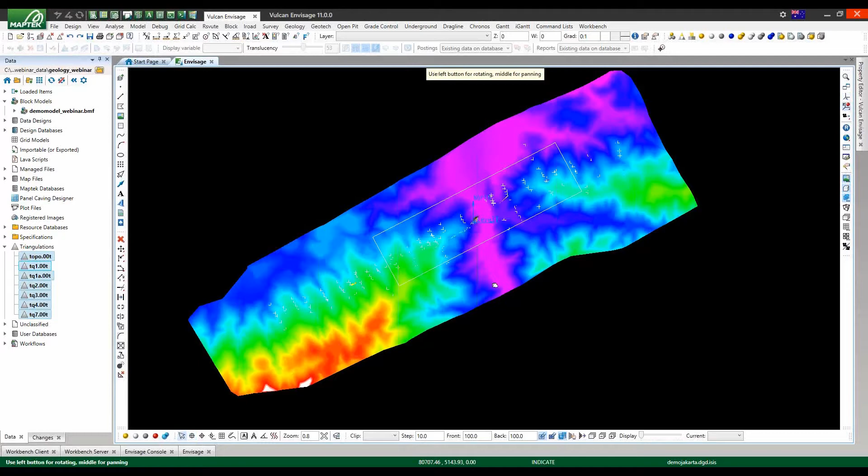So jumping first of all into our demonstration database here, we have a topography, we have some drill holes, we have a block model and some ore bodies on the screen there. It's one of our standard training data sets, and we'll use that to show some of the new capabilities. And for those that have used Vulcan 10, we have the Data Analyser available under Analyse, Data Analyser. And I already have that loaded, so we'll have a look here.

And previously, we could generate a variogram from a database. So in this case here, I've got the copper from a database with a filter on it, and I'm looking at a variogram here in red showing the variability of copper with distance, and I'm showing a model of that which has been made and saved in the Vulcan Data Analyser. So that's current functionality. The new functionality is now the ability to do that with block models.

So I have here a block model which is derived from the same drill hole database that we saw on the screen. If I go to variography now, you'll see that the variogram option is now active and live. So to use that function, I click on the variogram button. You'll notice a properties window over here to the right. I can input values of my search radius, different offsets in terms of the orientation, and when I'm happy with that, I can generate that variogram.

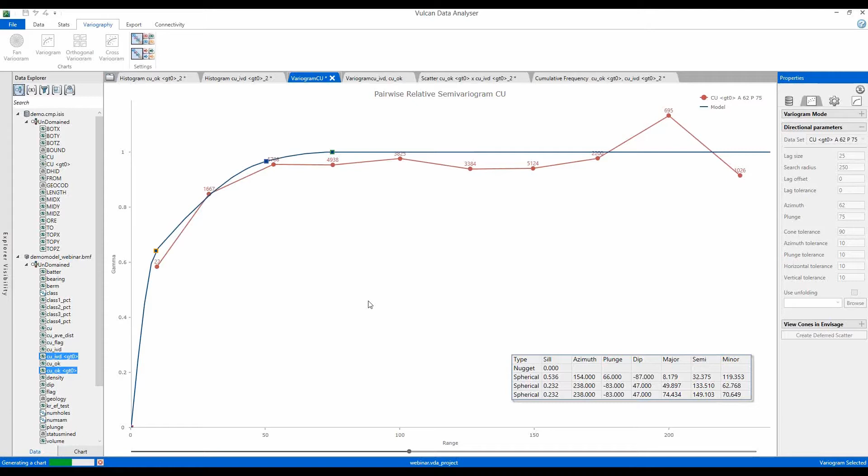Down here, you'll see a progress bar indicating that we're generating the chart. This is a block model with about 5 million blocks, so it's taking maybe 20-30 seconds to grab that information. Now you'll notice I've clicked on two variables here. I've got a copper that's been estimated with inverse distance and a copper which has been estimated with ordinary Kriging, and those two charts, those variograms, have appeared on the screen from the block model.

As well as generating a variogram, Vulcan and the Data Analyser has also generated a range of different things simultaneously. So first of all, I'll just put on the number of pairs so you can see the number of pairs of points that have been found in each one. And we'll just cycle through looking at the covariance function, the correlogram, general relative semi-variogram, the pairwise relative semi-variogram, the rodogram, and then the madogram. So all of those are generated simultaneously and can be charted and plotted like other functions that we've had also in Vulcan Data Analyser.

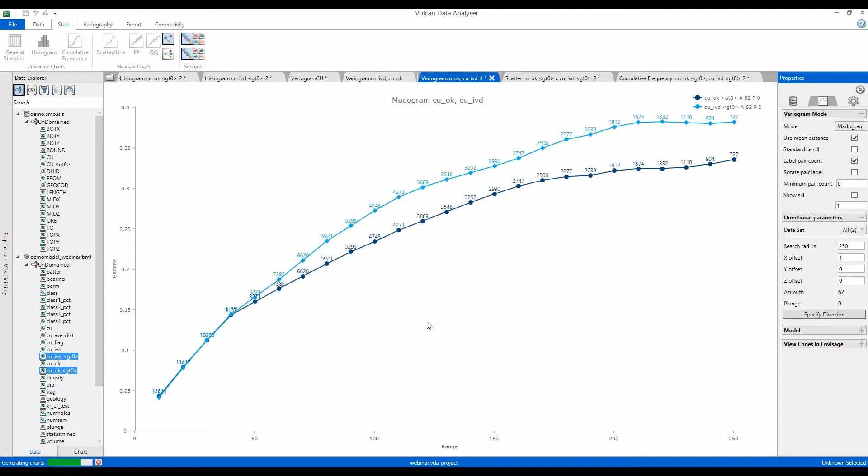So moving on from the new block variography, the next one in the Data Analyser which is new is the data connectivity, whereby information on a chart can be then demonstrated in 3D into Vulcan on the 3D graphics. So we'll start here with generating from our block model. We can use the drill hole database, but I've got a block model open, so let's use that. Let's generate a histogram of those variables. We have both the copper inverse distance and the copper ordinary Kriging. There we have the chart there, and a second chart here.

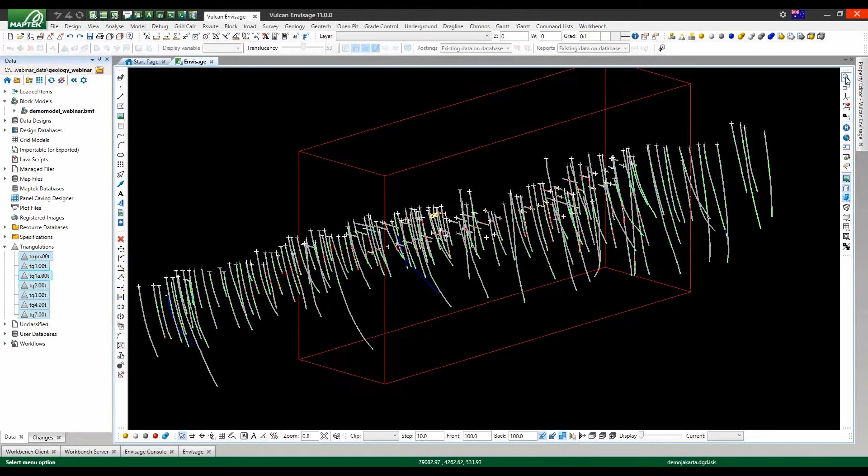So in this instance, I've got copper with inverse distance. I've got a population out here in 5%, a bin of information there. If I now go to the connectivity tool here and make sure highlight is active, if I click on that particular bin there, you'll see that it shades into a blue. And if I open up the Envisage window and remove our surfaces here so we can see, and zoom in, you'll see that there's a range of blocks there. Those are the centroids of the blocks that comply with what's on that chart.

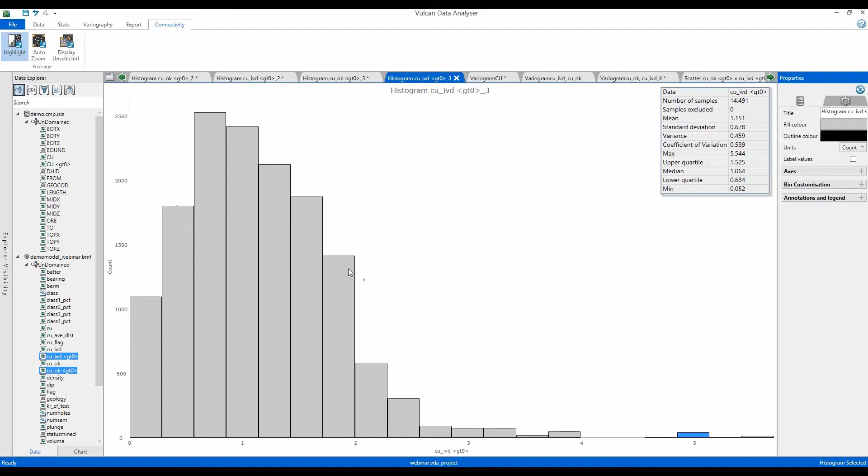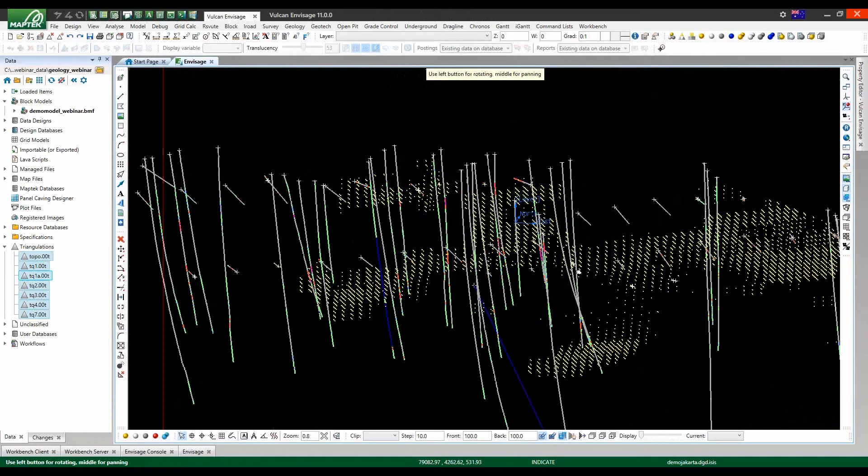So if I just zoom out again and go back to the analyzer and select a bigger selection, so we see all those three bins, it will now update the 3D graphics showing you the distribution, the XYZ positions of information that sits there on the chart. So very powerful functionality, allowing you to look at the 2D statistics and look at the spatial location of that data. Okay, so that is with the histogram.

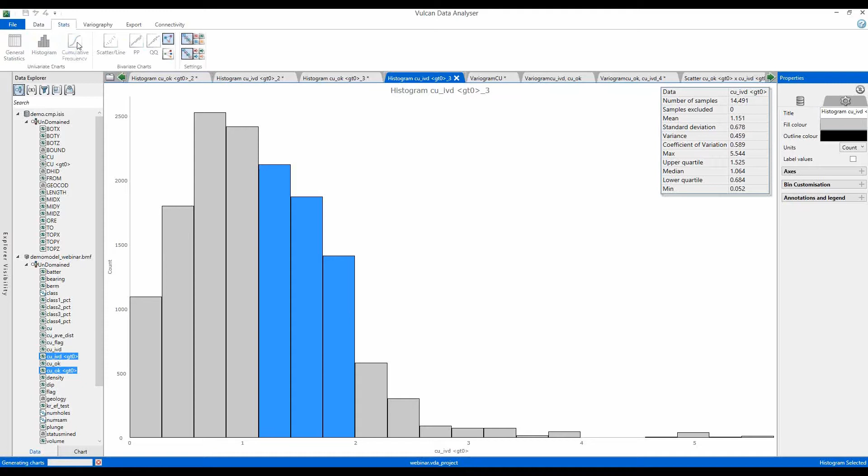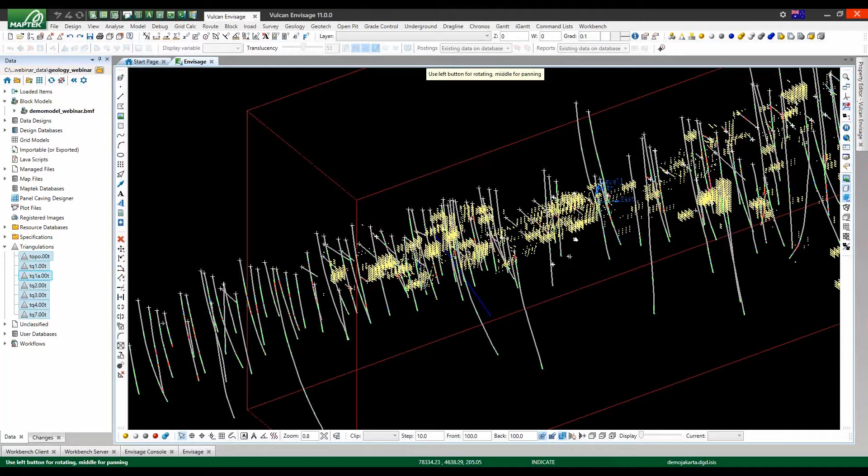There's similar functionality if we now go back to our stats and generate a cumulative frequency chart for both those. Again, that'll take a few seconds to generate that chart from the block model. And these charts often look better with a logarithm, so you have a logarithm there. Now, again, let's select part of one of these and have a look at where the data is, where that break in slope is. From the CDF, we can now look back into 3D, and it will show that information. So information that I selected on the graph is spatially located throughout that area there.

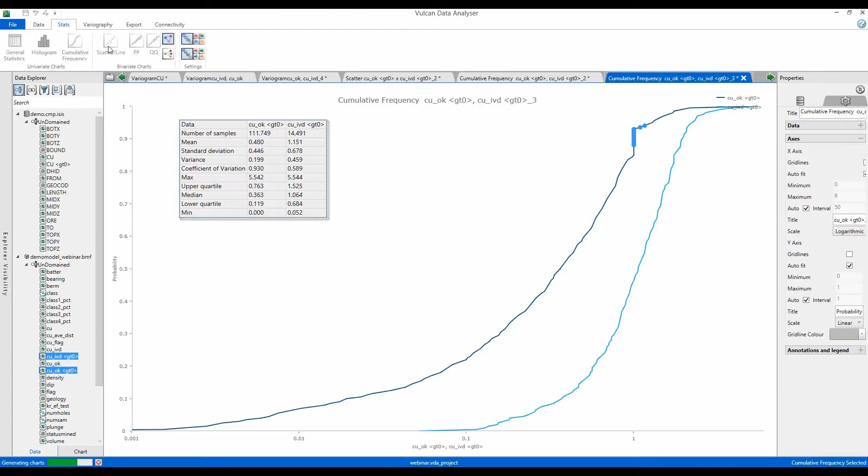And the final chart type here, because we've got two variables, we can do a scatter plot of those two variables. And again, this same capability of highlighting back into 3 dimensions is available. So I'll just put a trend line there, linear fit, and we'll give it a different color. So we have here a chart showing the correlation between the two different variables. I can put the stats there, so there's a reasonable correlation between those.

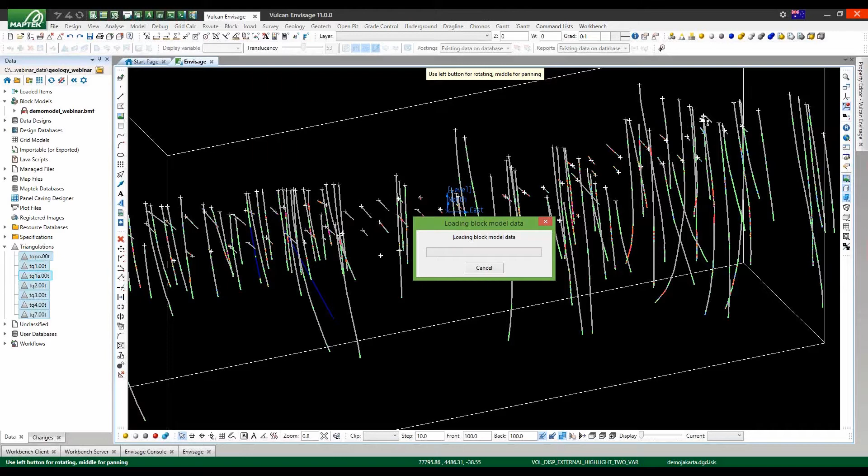Now, if I wanted to see where an outlier is, I want to have a look at where that value is there. It's just a single point. It loads up that single point in space, and I can locate that data there. And just to confirm on the chart, that information is fairly high grade, above 5-6% in the block model.

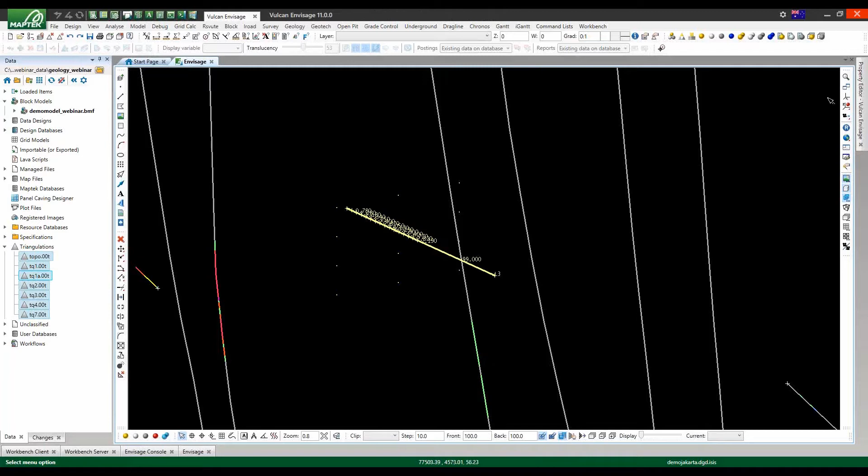We can go back to the 3D and have a look at the original assays in the drill hole, which is loaded on the screen there. And if I have a look at copper there, remember this is a block centroid, so there will be some averaging and smoothing, but there we are. We have a high grade area there with samples above 5% up to 10%. So each of those centroids of those blocks there are taking on a value that is around 5.5 there.

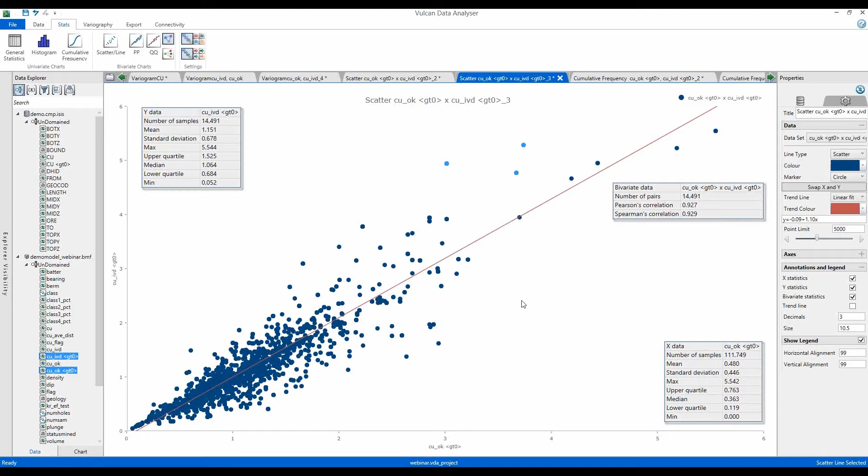Now you could also take a larger slab of data. So I want to look at a different range, and you can go back and select different information. And Vulcan updates that in the 3D graphics. Just zoom out and you'll be able to find where those samples are. So that data highlighting is new and will be available in Vulcan 11.

The second part of the demonstration here is to move to another new function, and that is the Kriging neighbourhood analysis, which can be found under the block grade estimation menu, Kriging neighbourhood analysis. Now, the idea behind this is to look at the parameters that you use as inputs to the Kriging process, and to understand and see the impact of changing each of the individual parameters on the Kriging estimate. So the idea is here we're looking to reduce or minimize the conditional bias, and so what we're using is a couple of parameters: the slope of regression and the Kriging efficiency, and we're trying to get them as close as possible to 1.

So let's open up this function. Like a lot of other Vulcan panels, you set up a specification file and you run that specification file. That means that you can go back and use that later with all the settings. So I've saved one here, and now there's two different types. You can do a local analysis and a global analysis. A local analysis is a single block, and you then look at all the parameters based on that single block. A global analysis allows you to look at a spatial region, so it might be part of a domain or a whole domain, and look at the parameters based on all of the blocks in that domain.

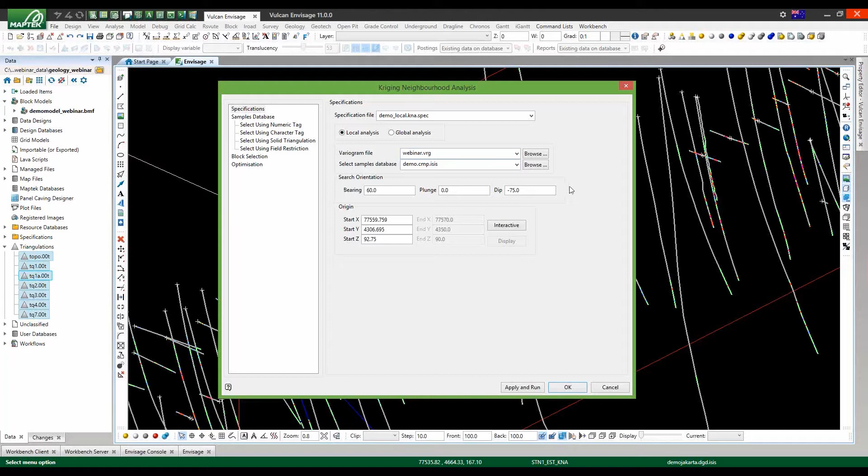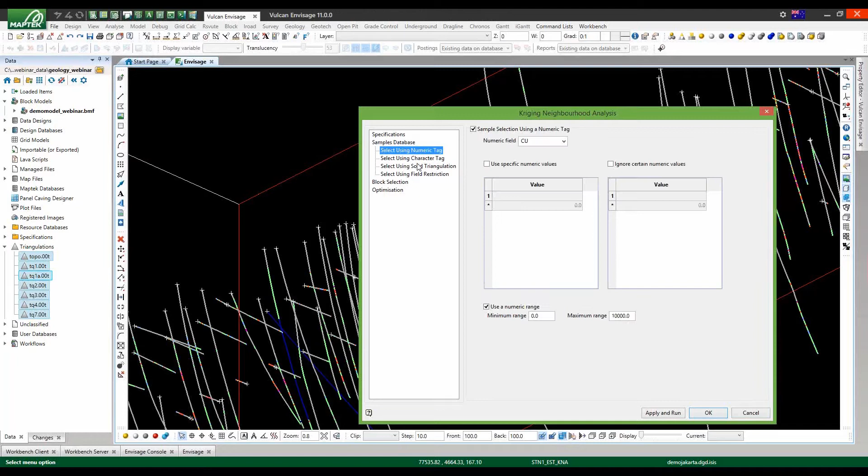So we'll start with simple. What it relies on as input is a variogram. So here we have a variogram that I've generated from the Vulcan Data Analyser. We have a samples database. In this case, it's a composite database. We have a search orientation. We have a single coordinate that we're using for the block centroid. Then we go through and use flagging within the database, a very standard Vulcan panel. So we select the field that we want to work with. We've got different filters for number of samples per drill hole, number of drill holes per estimate. We've used numeric tags and character tags, solid triangulations, and field restrictions. Once we've selected the data we want to use, we then select the blocks that we want to write to. And in this case, I'm constraining it to a specific triangulation region.

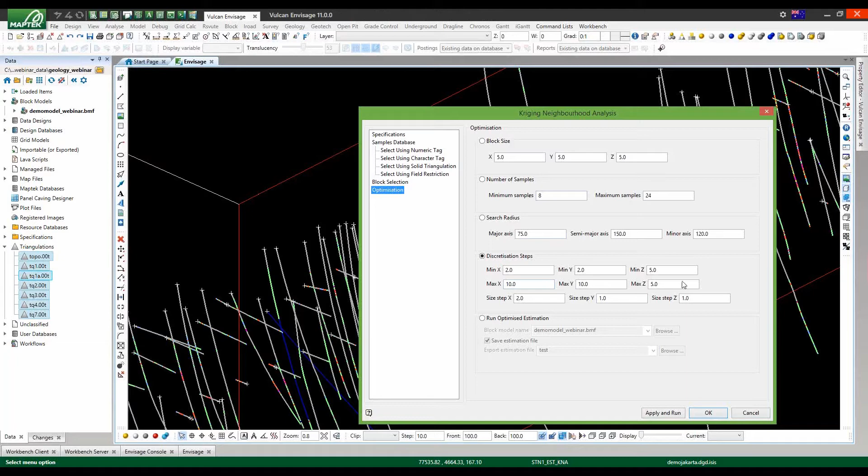Then we come to the analysis itself, and the Kriging neighbourhood analysis allows us to evaluate the block size, the number of samples, both the minimum and maximum, the search radius in each of the 3 orientations, and the discretization steps in 3 orientations. So we do those one at a time sequentially. So I'll start off with the block size. So I'm looking at a minimum block size of 5 up to 20 with a step of 5. So there'll be 4 different ones, and I'm doing that in those 3 orientations, and the Z I'm just leaving it at 5.

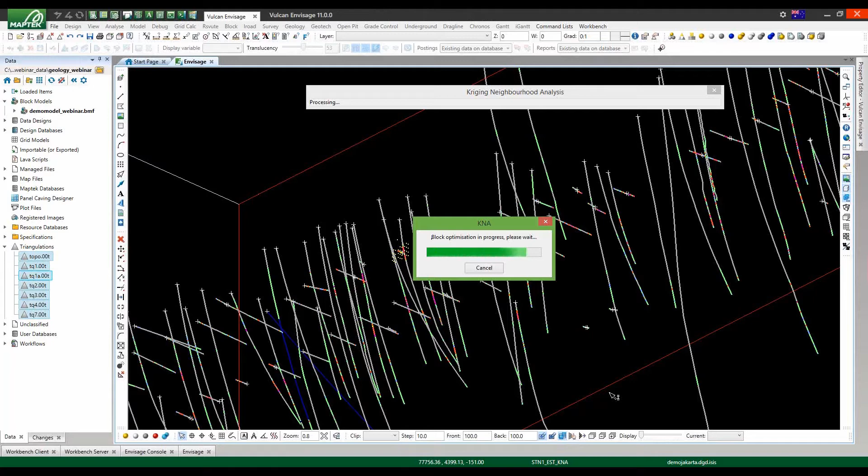Regular or non-regular blocks. So to do this, we just apply and run. It will take about 30 seconds to a minute to run using this block model with about 5 million blocks, and it will generate a chart that we can have a look at. From that chart, we'll be able to then select the values that we want to use. Now, this new function has been tested on numerous data sets and is available for beta testing, and will be, as I say, released later on this year.

Okay, so we've generated our chart. Now what we have on the x-axis here is the block dimensions, and we have all the different permutations of block dimensions as per the settings in our panel. Then we have here on the left-hand side the Kriging efficiency in blue, and on the right-hand side we have the slope of regression in red. And you can see the different values for the different block sizes.

So we're looking for values that are closest to 1. So really, ones up this end are showing you a better block size to use for your Kriging than the ones at this end. So in this case, I've chosen for argument's sake 5 by 5 by 5. I can then put that information in here, put my 5 by 5 in here. I can use that as a set. Then I can run the next set of parameters, look at the minimum and maximum number of samples.

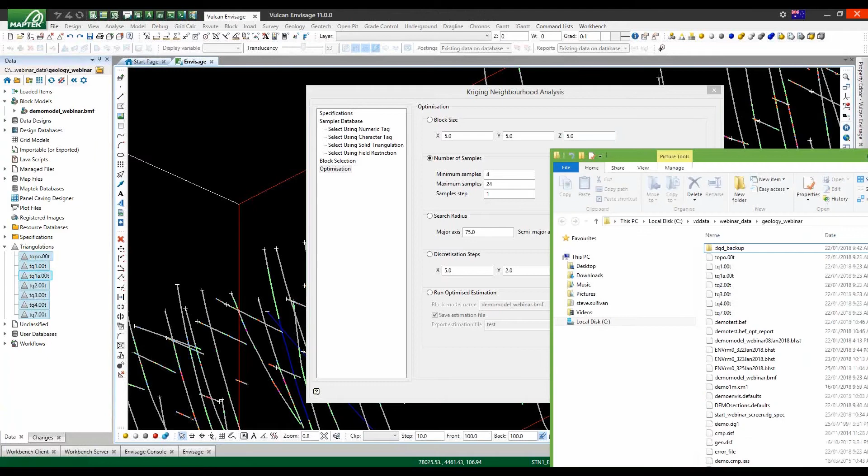Now, as you saw, that took about a minute to run. So for this webinar, I'll just grab some that I did earlier. And when you have this little chart, you've got a save button here, and you just save that figure for your reporting purposes. So I'll just grab the couple of others to show you what we look at here.

The minimum and maximum samples looks like this. Okay, so I start off with 4 samples for the estimate, right up to 24. And again, you see we're improving our estimates the more samples we've got. So you can choose a maximum, and then you can pick off a minimum here at a level where you are happy with the assessment.

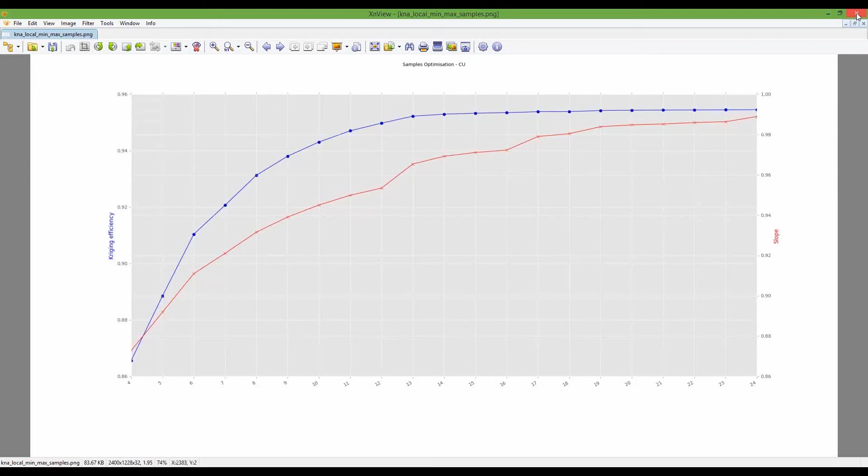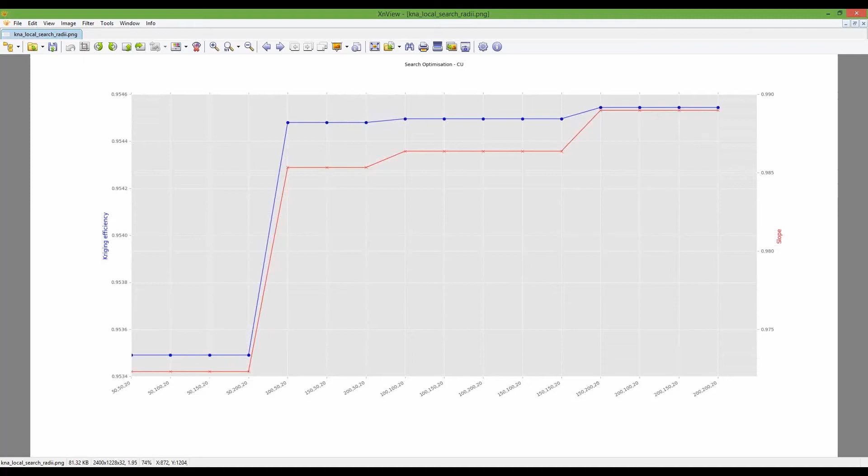The next one to look at is the search radius. So we're looking at the search radius. We have different sets again that we've set up, and again you can see the improvement towards this end of these sets of parameters here. So that's the third panel here, and the final panel is the discretization.

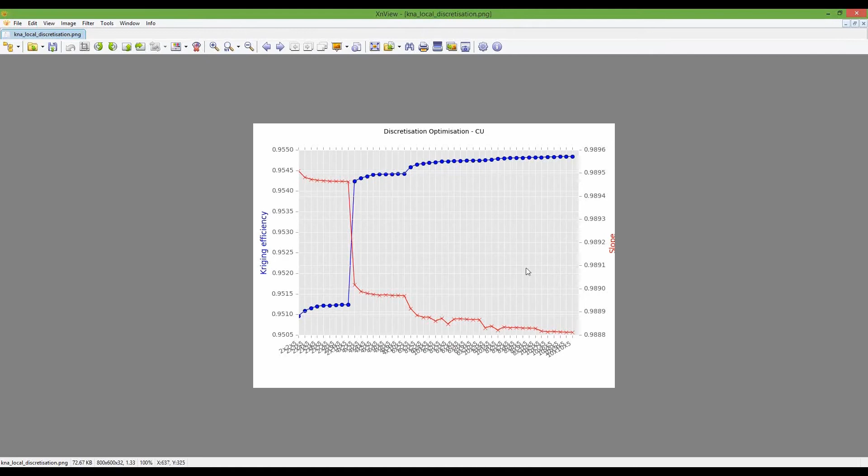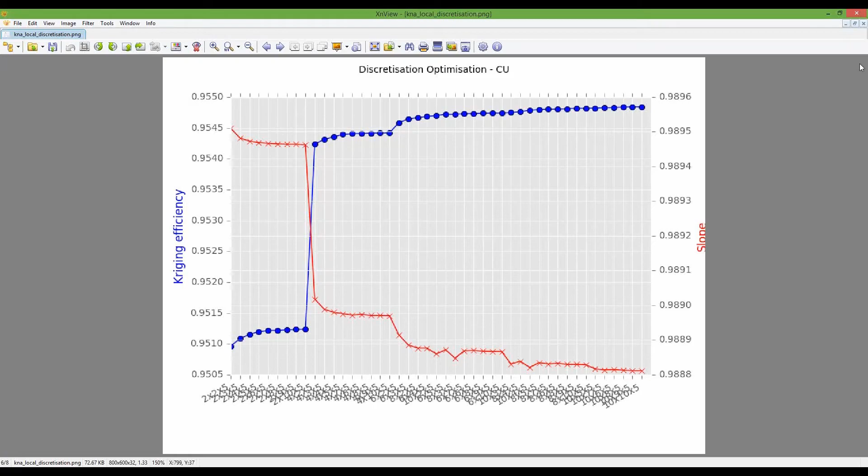So if I go back to my charting here, the discretization for the local one, and you can see here this one's almost an inverse relationship between slope of regression and the Kriging efficiency. But you'll notice that really there's not a lot of difference between any of these, because it's only in the 3rd decimal place we're getting any variation. So at this particular deposit, there's not a lot of sensitivity in your discretization. So those are 4 different types of optimization that you can look at.

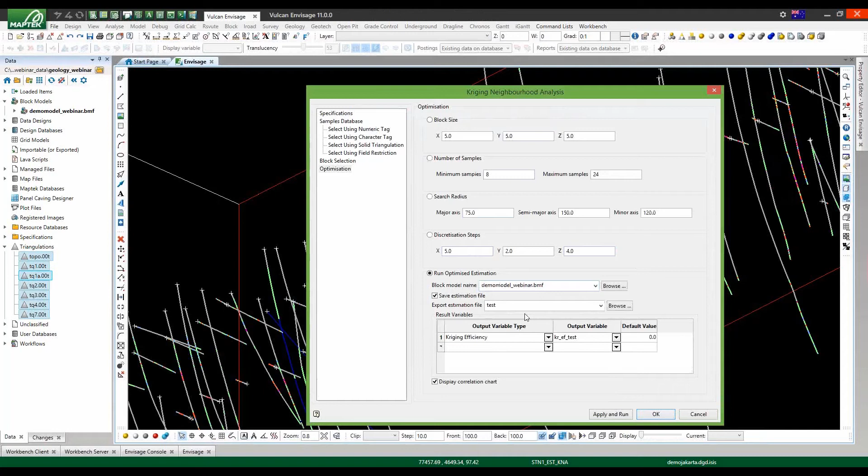And the beauty about this is after you've set up your optimization, you can then run the estimate using the optimal parameters into your block model. So this in effect is writing your block estimation file or BEF file for you, and then letting that run. So it not only gives you the parameters to use, it enables you to use those parameters and improve your workflow and get everything working in a smooth fashion.

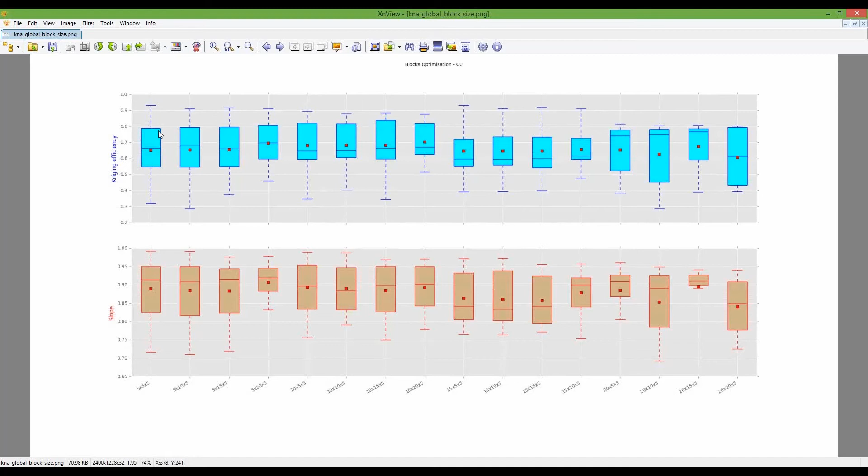Just the last one here will show you the global analysis, and this is where you can look at a spatial region of multiple blocks. And going back to the pre-prepared ones, if I'm looking at my block size here now, the chart looks a little bit different because we're looking at multiple blocks. So for each set of parameters on our block size, we now have a range from the minimum to the maximum. We have the median value and the mean value, and then we have the 50 percentile in here. So for each of these charts, you'll get a range of different things to look at.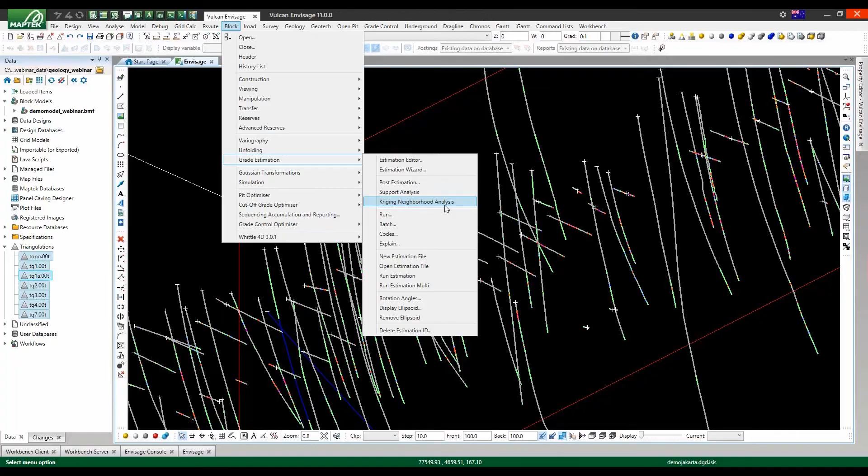And the third function we want to look at in this session is the geological sculpting, which can be found under the geology menu. Now, the geological sculpting is an advanced tool for manipulating 2D surfaces and solids. Because as geologists, we've got a lot of automated tools, implicit modeling, explicit modeling, and they can come up with some very complex shapes. But sometimes you need an extra tool just to get that shape right, to match the model that's in your head with the one that you want to use in your resource modeling. So this geological sculpting tool allows you to do that advanced editing.

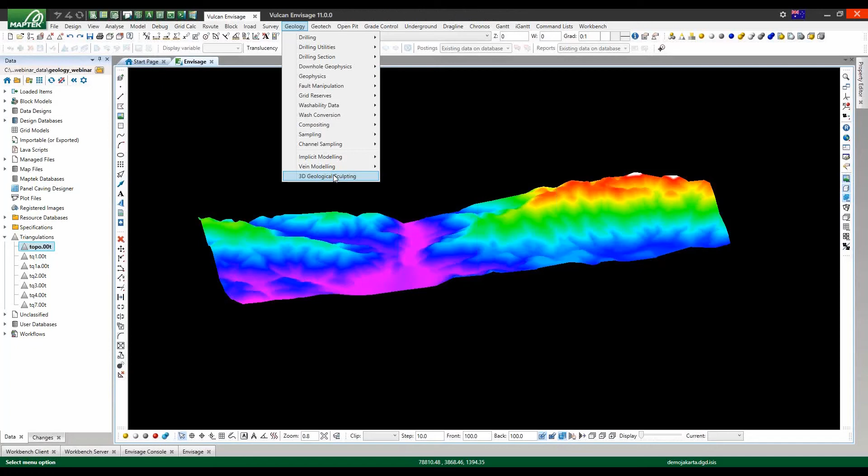And the way it works, I'm just choosing a topography here. We have a radius of influence, so I can choose 100 to show you how that works. I can select a point, so a point here, and that's giving me an influence of 100 meters, and I can just move that facet or series of facets to a new position.

Now, if I don't like that position, I can undo that and go back to the previous state. So if I just change that now to 500, to show you the influence of 500 for the same area, you'll see that now I'm having more influence on that terrain with the 500 meter influence. And again, I right click, I can just undo that back to the previous state.

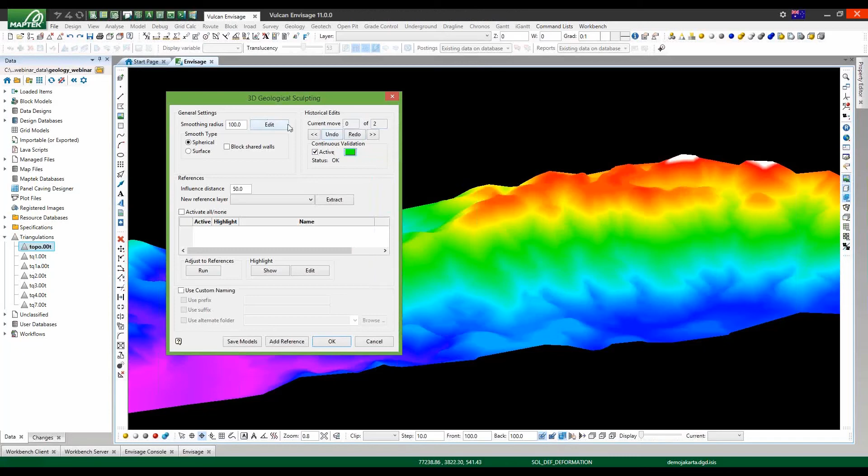Now if I go back to the 100 scenario and edit that up there, I'll grab another one like that. Now, for some reasons, you may want to get these things very close, and they may cross or they may go behind, but you don't really know. So we have now a tool, if I just undo that, a tool here which allows you to show where the active crossings are. So if I was to do that again, maybe zoom in a bit, we have a look, come up with another point.

So these two are independent, but as soon as I go over here, you'll start to see that there's crossings there, and you can then reverse that back. And if I grab one again, while you're still doing it, you can see they're all crossing. You don't want crossing triangles because later on in the modelling process, in the block model, and also when you're doing reserving and passing data to engineers, etc., it will cause problems. So we don't want to do that. So that's an interactive tool which allows us to say, hey, look, that's happening. Let's prevent that from happening.

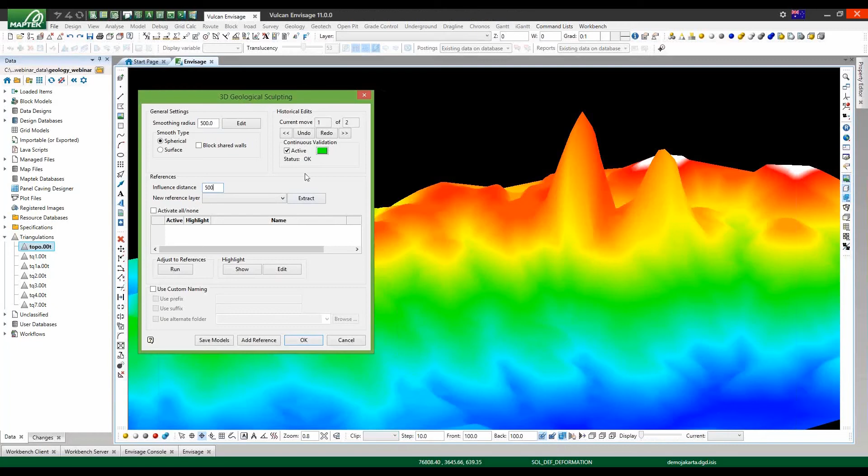So now there's another tool here available, and I'll just increase the influence there, increase the influence here, which allows us to use a reference line being a CAD object in Vulcan, so it's a line that you've digitized. I can go to my design database and select a layer of digitizing. I can extract that from the database and activate that, so you could have one or a series of those.

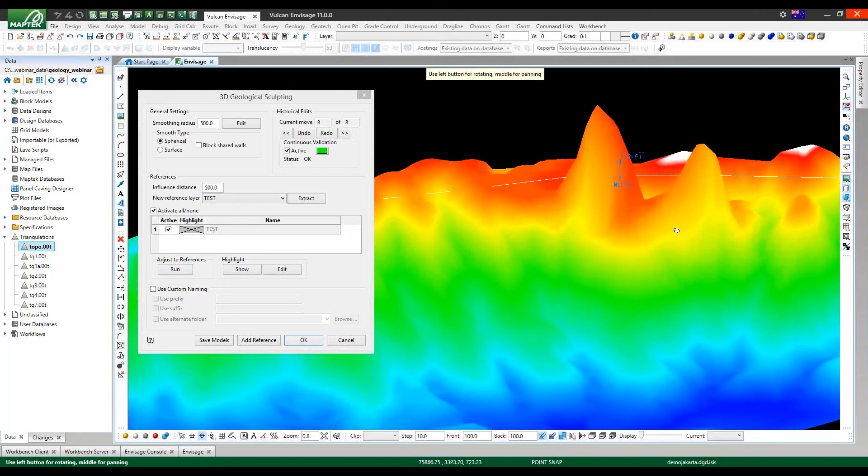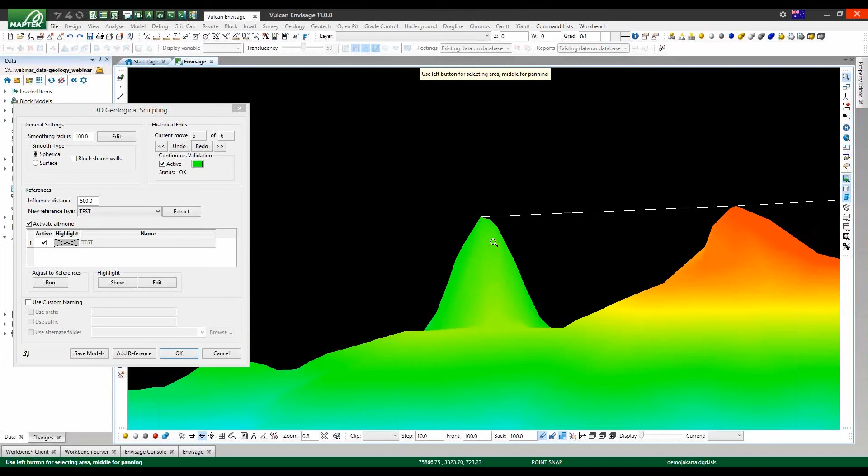And now when I run that, it moves all the data based on our influence here, these influence radiuses, by that amount. So I'll just undo those ones, go back to only 100 there, might be a bit more obvious, and let's just try running that. And so every point on this line, the data has now come to match that point using our radiuses and our influence distances. So you can see that there's 5 or 6 points on that line, and there's now an option to save that.

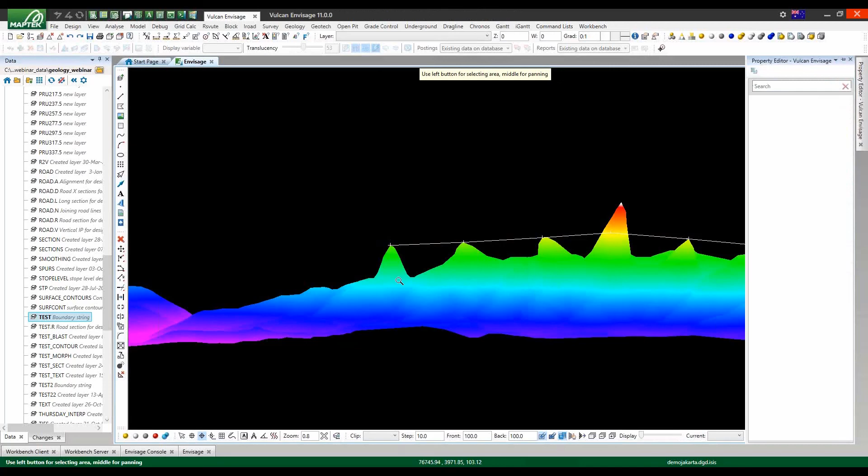So I'll grab that line again just to show you. So you can use your design data to really control exactly where you want these surfaces to go. So here we are, and if I just highlight the points on that object, the point display, you can see wherever there was a point, that's where that influence has been on that surface. So that's geological sculpting, and it allows you to manipulate further and correct and get right your geological models, both 2D and 3D.

So that brings us to the end of the demonstration for this session, Susanna, so it's back to you. Thanks for such a detailed presentation on some of the new geostatistics and surface modelling functions. Steve, what Vulcan modules do users need to access these new tools when they come out?

For the first two functions I showed, that's the Vulcan Data Analyser and the Kriging neighbourhood analysis, they'll be available on release of Vulcan 11 for those that currently maintain a Geostat modeler license. The third one, the Geological Sculpting tool, is a module available for purchase separately, and customers can contact their local Maptek office for pricing.